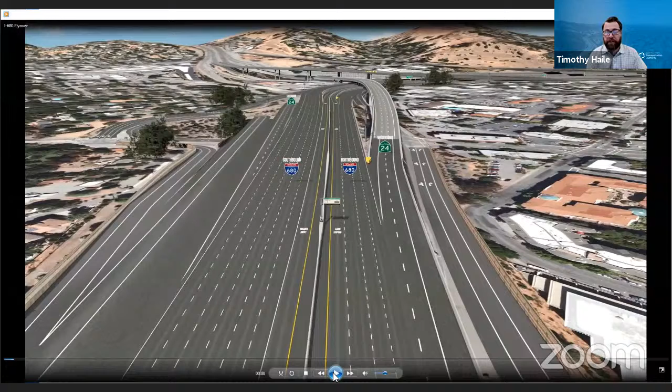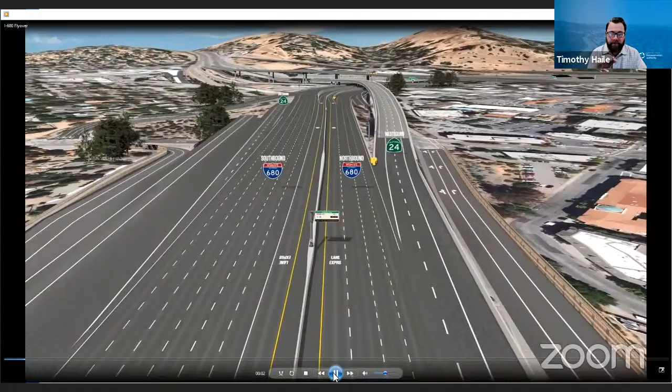We wanted to make sure we're using visualizations like this to articulate and illustrate very complex issues. So what I'm going to show you is a simulation of going in the northbound I-680, and this would be alternative 1 to close the gap, alternative 1C. Basically we use this technology to articulate and visualize what can happen in the corridor. We're actually using virtual reality technology.

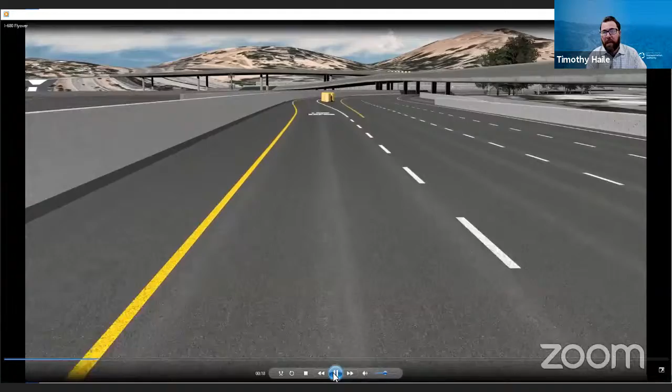This is just a draft at this time, but as we continue to develop the projects and this technology, we'll be able to better communicate the alternatives to the public, to you, the Policy Advisory Committee, and others, and also have it on our website so people can understand what these alternatives will look like in the future to get better input.

In this particular video, you're in the express lanes, and at this location you're on the other side of the 24 connector that's flying into the middle of the freeway from the westbound direction. The video is going to shift and turn to give you a different perspective looking back on the corridor, so I can further articulate how the modifications will work.

Where you see the existing express lanes, that's actually where... whoops, I apologize, I should have paused. So the express lanes where they're at in the video is where the existing I-680 southbound is today.

To minimize impact to the BART structure, so we don't have to do any seismic retrofit, this alternative shifts the I-680 southbound to the west—we're looking south right now, but it shifts to the right into the next bay, in between the two columns under the BART structure. Where the 680 southbound is showing in this video is actually where the existing 24 connector is, so we're shifting that connector over to the right some more. We're going to put in a retaining wall, and shifting the southbound and the westbound 24 connector over allows room in the median of the freeway for a fully barrier-separated express lane on the 680 corridor within this section.

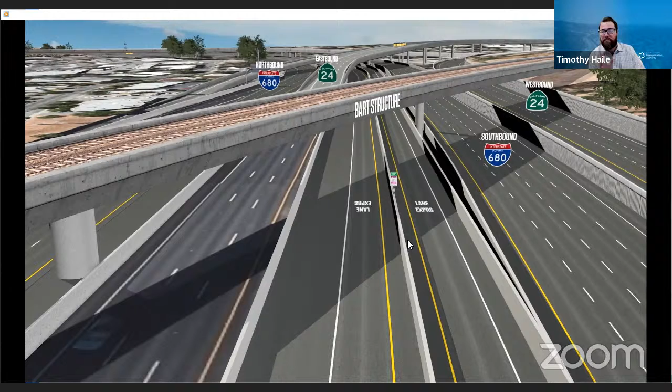What's important about having barrier separation is it minimizes the weaving at this extremely intense hotspot in the corridor, and it also minimizes impacts on the east side of 680 where you have the existing developments, the existing Walnut Creek Public Works Center. So we're trying to minimize all those impacts on the west side and the east side, and shift the southbound to the west into the hillside with a retaining wall. The other alternative, as I mentioned, alternative 2, is the Lawrence Way and Treat Boulevard alternative.

Tim? Why was the shoulder so large? I didn't want to go on before asking—the shoulder was super large in there.

So as I mentioned before, these are still in draft, so we're still working through those. That shoulder is too big. Okay, I just wanted to double check that. Okay, yeah, thanks—that shoulder wouldn't be that big.

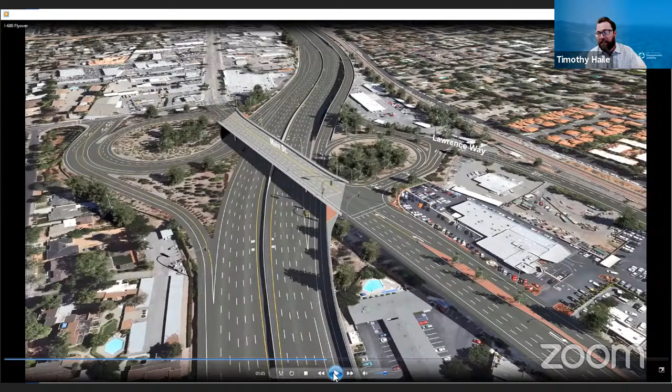We're still tweaking and modifying these, but I felt it's a good opportunity to articulate what some of these alternatives are doing, and get some feedback.

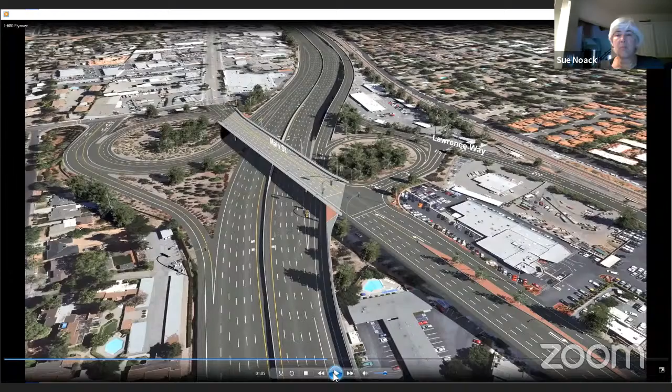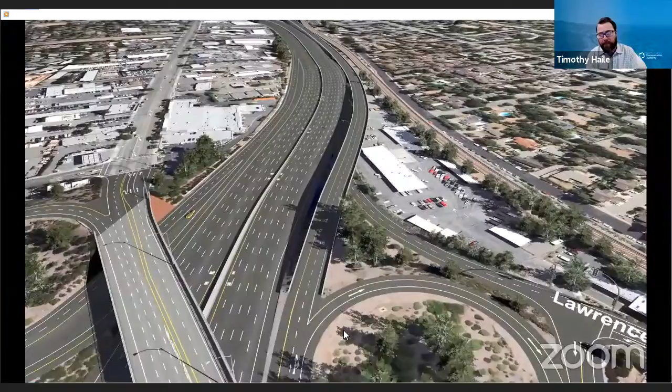Here, this is North Main Street, again looking north on 680. You can see Lawrence Way there getting on the freeway. This is actually the braided concept that we're considering. We also have another alternative, the collector distributor road system.

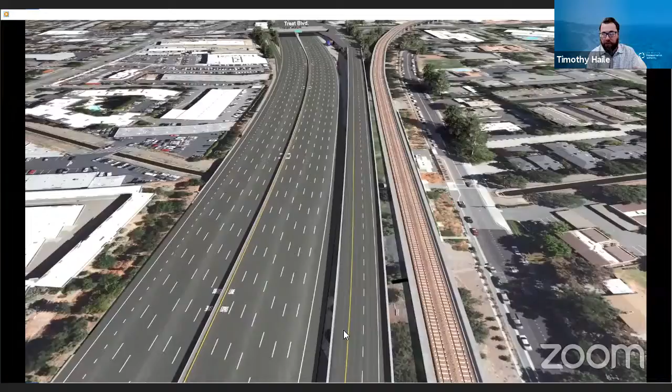This is again looking at solving that weaving happening between Lawrence Way and Treat, to minimize the weaving and reduce congestion on 680, thereby reducing that bottleneck. You'll also note the truck scales are there, so those do get impacted, and we're working closely with Caltrans and CHP to incorporate that into the overall design.

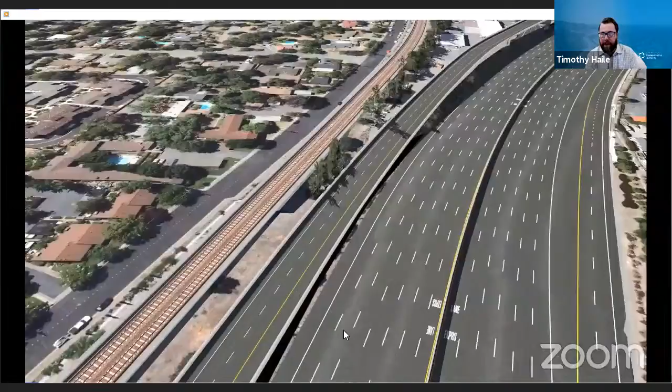The video is going to rotate now and go south, showing you a different perspective of the overall braided structure. We're obviously trying to minimize impact to the Walnut Creek Public Works facility there.

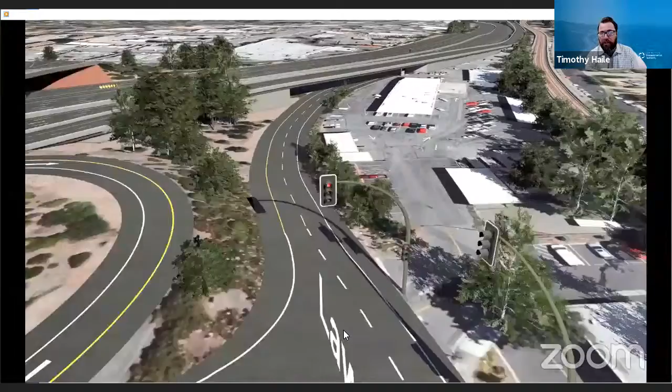We're also looking at ramp metering in the corridor, which you're going to hear a lot about today—some of the concepts we're doing with ramp metering. Ramp metering gives us the ability to manage and meter traffic onto the freeway, thereby managing those bottlenecks and congestion. This gives you a perspective of what it would look like driving through the braided connector and stopping at the ramp metering before you get onto the freeway.

What we're planning on doing is actually developing visualizations like this all the way from Bollinger Canyon all the way up to 242, to better articulate some of the strategies and projects that we're developing in the corridor.

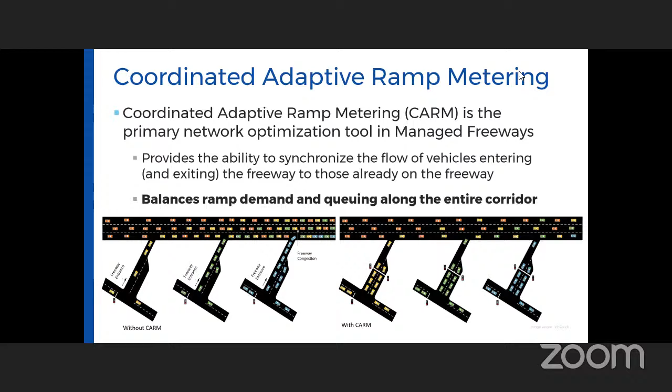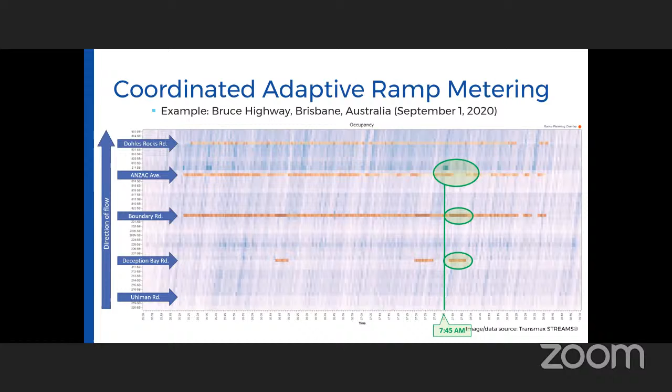Again, an hour and a half later, the same situation occurs. You can see the Anzac Avenue metering rates going from dark to light, dark to light — that's it working to adjust those queues. Boundary Road steps in and takes some of that load, and when Boundary Road is no longer able to help, Deception Bay Road steps in and takes some of that demand too. The system is working together across all the ramps simultaneously to balance demand and minimize the potential for backup onto the arterial system.

Based on that experience in Australia, they don't see queues on the ramps backing up onto their arterial streets. The system is always able to respond and resolve the issue before it becomes a problem. It works because the corridor uses not just one control algorithm, but multiple control algorithms looking at all those different components to determine an appropriate metering rate at the local ramp, but also at a corridor level. So if a local ramp can't manage demand, it can call to one of its neighbors and say, I need you to help me out, I need you to help me lift this heavy load. That's how the system balances demand across the entire corridor.

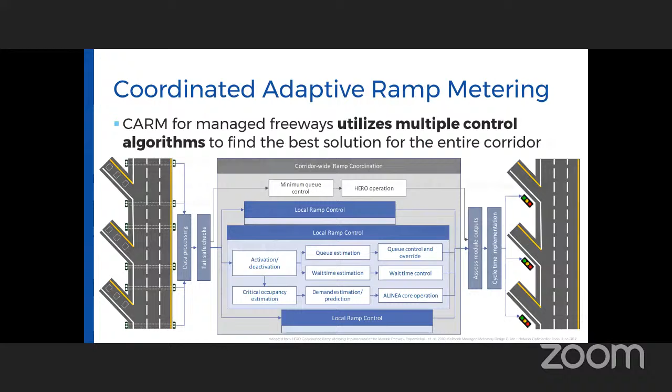So in summary, managed freeways and the use of coordinated adaptive metering is a comprehensive strategy that utilizes multiple control algorithms to optimize flows along an entire corridor. What really differentiates it from systems you might be familiar with is that it balances ramp demand and queuing along the entire corridor in real time. It's not an isolated ramp location or a couple of ramps working together — this is the entire system continuously looking at a full corridor and balancing those demands continuously to minimize the risk of that backup you're concerned about.

The overarching system is then able to consolidate other traffic management devices and ITS elements into a single platform, so those can work harmoniously with the coordinated adaptive ramp metering, allowing the entire system to work together seamlessly and provide the most effective solution to your traffic problems.

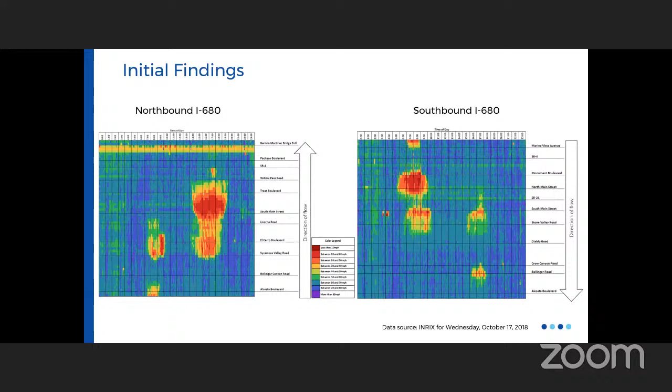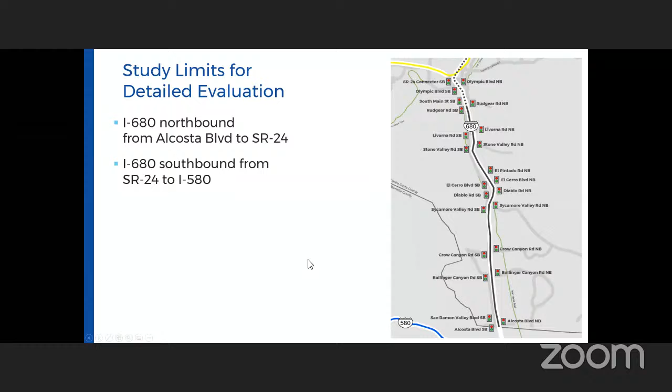So that really directed us to focusing in on this study area. The limits, as I mentioned before, are from the State Route 24 interchange with Interstate 680, extending south down to the Alameda County line. For the southbound recommendations, we're also looking at our Alcosta Boulevard ramp, which is actually in Alameda County, but we think is necessary to be part of the solution because it's integral to that San Ramon, Alcosta Boulevard location.

So the first thing we did was go out into the field and take a look at what we're dealing with. We did this back in the late spring, early summer, so we did have the benefit of COVID-19 keeping traffic volumes down, so it was quite safe and easy for us to get out there and take a look.

What we found is we have a lot of opportunities in this area. There's a number of ramps that have already been widened as part of other projects, so that will help to reduce the capital or civil works necessary to accommodate ramp metering at some of these locations. Some locations already have detection, have cabinets with ITS vaults, et cetera, located in the corridor, so we think we may be able to leverage some of those.

We really didn't find any fatal flaws to the ability to implement this concept in this particular study area, but there are some constraints in terms of embankments, existing structures, sound walls, other physical features that are present that will need to be addressed when we get into a design phase.

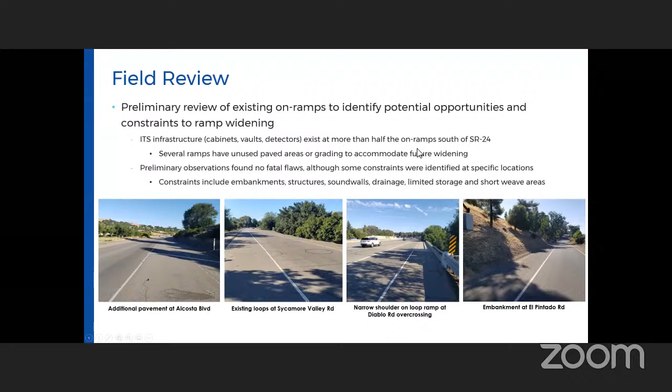We also do some corridor ramp metering analysis, and that really takes a couple of steps. We do this because we need to understand if there's any constraints in terms of mainline capacity, in terms of the available storage space or discharge capacity on the ramps to be able to accommodate the metering.

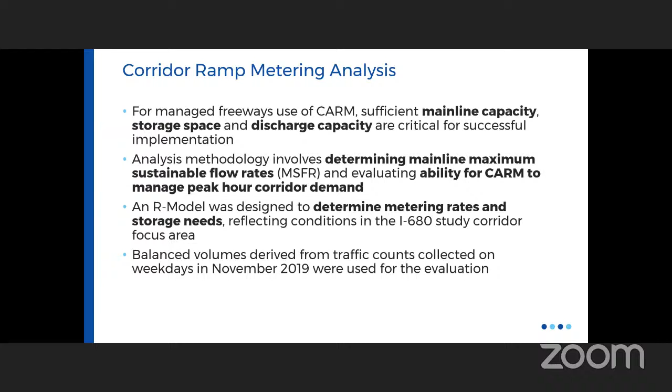We start by looking at the maximum sustainable flow rates on the main line as a screening tool to identify if we have any bottleneck locations on the main line, and what are the contributing factors. Then we use what's called an R model, a statistical analysis tool that allows us to test a range of different metering rates and storage needs as a basis for making recommendations on what the ramps need to look like in order to accommodate this type of improvement. Those were done with pre-COVID data from 2019, from November of 2019.

So that first step in the process is doing a screening of the maximum sustainable flow rates. This is not the capacity of the roadway, but it represents the actual flow that you could sustain, taking into account some of the constraints that there may be in the corridor. So if there's a lane drop or a grade or some sort of factor like that in the corridor, it has an effect on the ability of that roadway to carry sufficient traffic.

So what you see in this chart, the black line represents that maximum sustainable flow rate, the maximum capacity that the road has to carry traffic. The blue and red bars represent the observed volumes from November of 2019. You can see highlighted in red are locations where there are volumes exceeding the maximum sustainable flow rate of the freeway. So what that means is that those locations are at risk of breaking down and becoming unstable and then falling into a congested state.

So in the southbound direction, similar, actually a little bit more locations. Really the core part of the corridor is affected by capacity constraints during the morning peak period in particular. You can see a number of locations where the current flow rates are exceeding those maximum sustainable flow rates. Now, the good news is that none of those locations are substantially over the maximum sustainable flow rate, so it means there's an elevated risk that they will fall into an unstable condition, but it doesn't guarantee that will happen.

And so that's really the margins that we're working with in coordinated adaptive metering. What we're trying to do is better control traffic into these locations so that we can prevent that instability and that flow breakdown and keep the freeway as productive as possible. The more traffic that we can handle on the freeway, the less traffic is going to intrude onto your arterials.

So the next step in the process is to actually conduct that ramp model analysis that looks at the ramp storage and the ramp wait times. These exhibits illustrate those two measures.

The upper half of the charts represents the wait time at each of the ramp locations, and this is the northbound direction. The lower half of the exhibit represents the queue lengths at each of the ramp locations.

The blue bars represent a range from the 50th percentile to the 95th percentile, so an average case on the bottom end to an almost extreme case on the upper end. In this northbound example, we can keep our wait times well below the 4-minute desirable range that we like to use for managed freeways purposes. Caltrans actually uses 7 to 10 minutes for their ramp metering, so we are very confident that we can get these ramps to work effectively.

What you can also see is that there's a number of ramps where that range is pretty consistently from 0 up to sort of the 3-minute mark. That's the cluster of ramps that would be working together to balance demands across each of those ramp locations in order to mitigate those bottlenecks, or the red bars that you saw on the previous chart.

In the bottom half for the queue lengths, the blue bar represents the 50th and 95th percentile ranges, and the red dashes represent the existing capacity on those ramps. You can see that at all of the locations, we're not getting close to the existing storage. We are, however, proposing some additional storage at a number of these locations to deal with future demand, and also to deal with the ability to discharge more traffic when that opportunity exists.

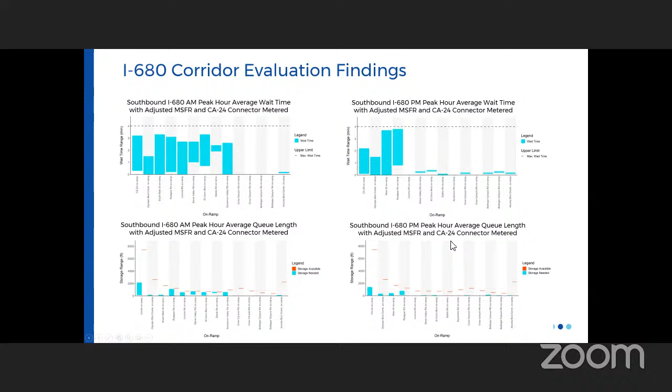And so you can also see that reflected in the wait times, with many of the wait times getting closer to the 4-minute mark as a result of that.

But the good news to take away from all of this is that we have sufficient storage, even under existing conditions. We are confident that the level of demand that is out there can be managed with a coordinated adaptive metering strategy, although we are making recommendations to add some additional discharge capacity and some additional storage capacity to deal with those future demands, and also the ability to discharge more traffic as we need to.

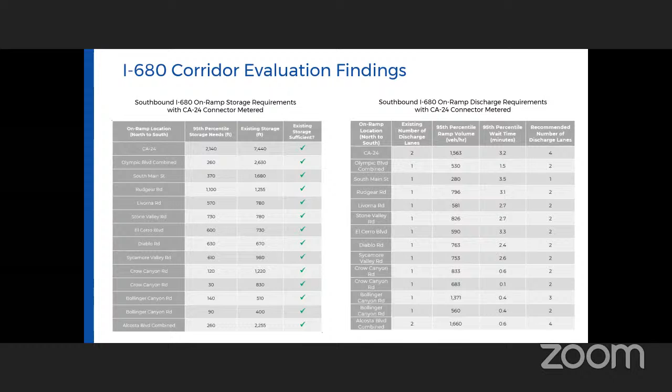So this is really guiding the development of some conceptual designs now for the ramps in the various locations. Tim, I think if you go to the next slide, there's an example. Oh no, this is summarizing the results.

So I was just saying we can manage the traffic flows. We do need to meter the connector from State Route 24 in the southbound direction, so that will be an additional element to the project. Although metering freeway to freeway connectors is not new in District 4, and in fact, the 580 connectors from 680 are already metered.

We can manage the ramp queues within existing capacity with that additional capacity that I talked about. So I got ahead of myself.

Here's a conceptual design that we've developed for one of the locations in the corridor. This particular location, and there's a couple of these examples in the corridor, we have what's called a partial cloverleaf interchange design. Those of you from the southern end of the region would recognize these interchanges - it's where we have a directional sort of diamond ramp, in combination with a tight loop ramp for the opposite direction. One of the challenges we see with these interchanges, and we've observed it in your particular examples, is that the weave distance and the merge distance from these ramps is very short, particularly the loop ramp.

It really is only a few hundred feet that is provided to allow vehicles on the ramp to accelerate and weave into the general purpose traffic stream. Now that's fine in COVID conditions when there's not a whole lot of traffic out there and there's plenty of space, but it really becomes a problem when the traffic is relatively dense and moving faster on the freeways.

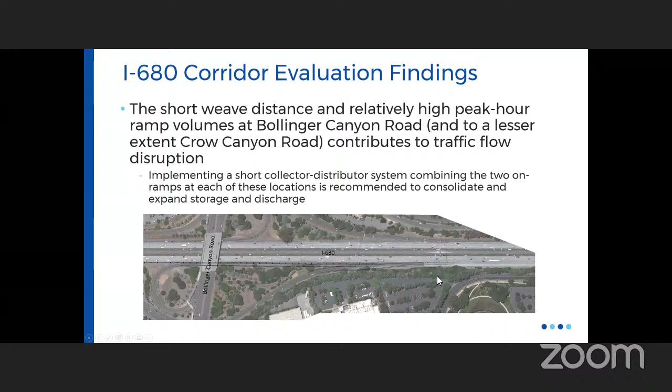In addition to the freeways, we are looking at some opportunities on the arterial streets, and we touched on this with your public works staff when we met over the last few weeks. One of the things we're interested in demonstrating is the use of traveler information signs on the arterial streets. This is an integral component of the Melbourne project. They have these small variable message signs located near the approaches to their freeway ramps, so that way they can communicate alternative travel times to drivers. We feel it would be useful to include some of these as part of this demonstration.

We're really focused right now on the San Ramon area to demonstrate a few of these, primarily because there's a number of arterial corridors in that area running parallel to the freeway, so there's alternatives provided that would benefit from having these examples. But ultimately, we're looking at potentially including these along the entire corridor.

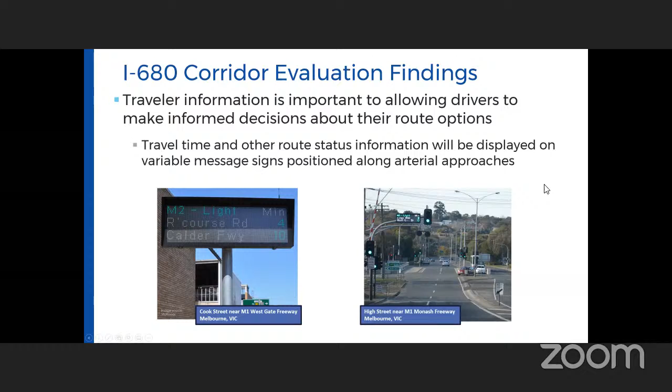The other traveler information tool that we use is enhanced signage at the ramps themselves. Caltrans typically has an illuminated sign that indicates that the ramp meter is on, but it generally doesn't provide any other information. What we like to do with the managed freeways approach is use a small variable message sign that actually has the capability to display a range of information.

That's so we can indicate if there's an accident or something on the freeway that needs the ramp to be closed, or some other major disruption, and discourage people from actually turning onto the freeway. There's not much use directing people onto a freeway if it's broken down and fallen into a congested state. So the better information we can provide to travelers, the more effective we can be in managing our system. This is another element that will be integrated into the project, which will be a first for California.

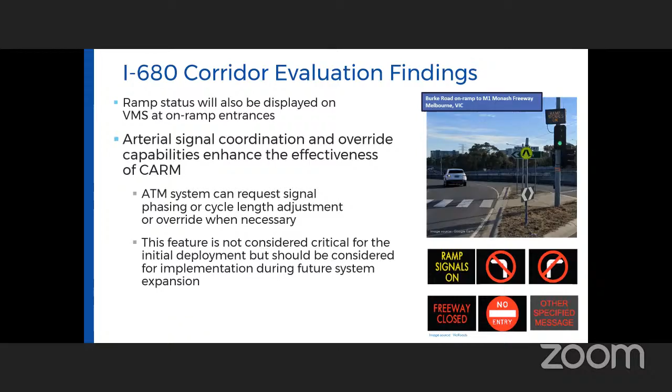Tim mentioned at the start that Caltrans does have its own ramp metering project. They have received SHOPP funding to install ramp metering along the full length of I-680 in Contra Costa County and also a couple of other segments of freeway in your neighboring counties. There's a lot of consistency between what they had proposed doing as part of their ramp metering project and what we are doing as part of this CARM demonstration.

The ramp meter installations themselves, the ramp improvements, those are all things that would have been done under the Caltrans ramp metering project. So we're working right now with Caltrans staff, and there's a number of them on this call, to identify where those similarities exist and see what can actually be accommodated through that project, and then to identify the different elements we would be doing specific to CARM and figure out a strategy for how we can actually get those deployed.

So we met with those Caltrans staff recently and went over the findings that we've presented to you today. We're also coordinating with Headquarters District 8 on other efforts in the state. We think we have a common vision of where we're trying to go and are working diligently together to figure out how to get there.

We continue to develop those conceptual designs and cost estimates that will help inform the subsequent steps in the process, who does what, how we integrate CARM into the overall program, and that will be reflected in the program concept of operations. We'll continue working with your TAC to develop more specific recommendations as part of the project, help them understand some of those technical details, and ultimately bring some of these elements in later phases to the arterial system so some of those same benefits extend to the local communities.